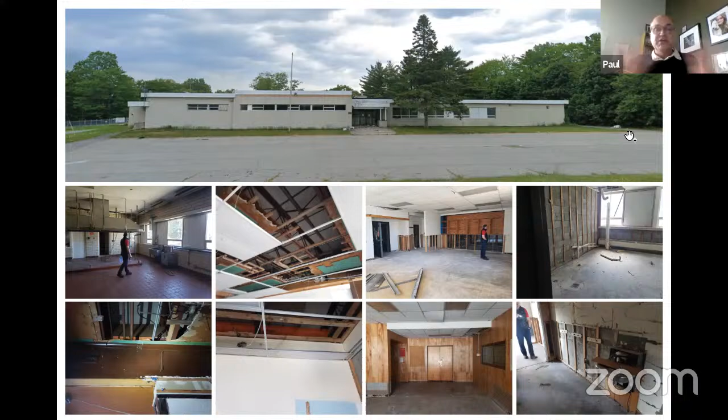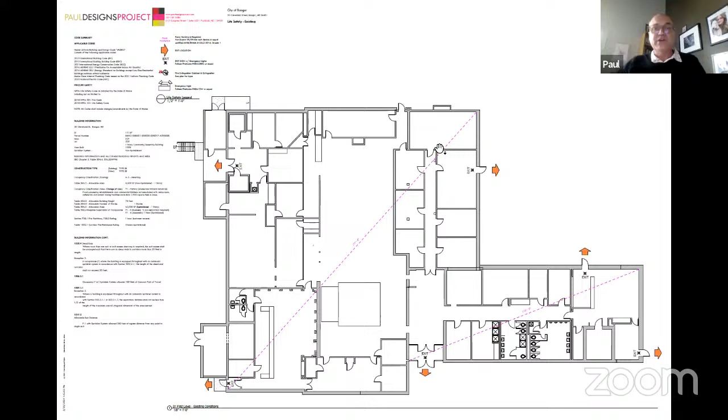And we've got our initial 3 options, we'll demonstrate that. So here are the design concepts we started with. I'm going to let my colleague Paul Bryant, our project lead, talk a little bit about the concepts and the nuances of each one of them.

I'll start by saying these 3 concepts we were looking at represent sort of a range—from what's the least you could do to what's the most you would want to do—as a framework for approaching the renovation of this building.

I'll pick up from what Paul was saying: we were trying to retain as much of the existing building as possible. That was one of the key goals of the project, outlined by Anne and her team—trying to keep as much of the existing perimeter of the building as we could, and figure out what we can use from the current shell and how we can reinterpret that into a future space for the Bangor Central Kitchen.

So in this first option, we were trying to understand how we wanted the flow of the space to work. In doing a lot of these projects, we found that the most key point of the entire building is where the loading dock is, where items are taken in and out of the building—whether to be sold, packaged, processed, or produced. In the current state of the building, for this first option, we thought it best to keep the loading dock where it was and see how that would play out in terms of access and flow. Currently, the loading dock is on a small driveway access point right adjoining Cleveland Street.

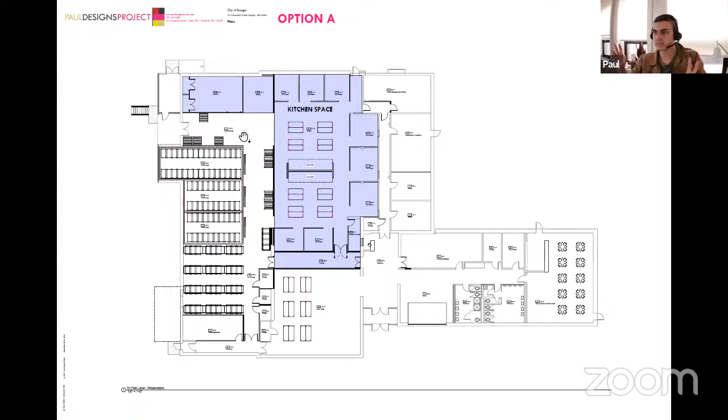In thinking about that, one key point is having a central area where receiving and outgoing products has uninterrupted flow between all avenues it needs to go, whether that's the kitchen or cold or dry storage. Having quick, open access to the loading dock is really important to us. We typically call this, in essence, the hub, an area where basically everything revolves around. That helped us articulate most of this initial scheme.

A lot of what you'll see on the interior walls, most of these filled in with white, is existing walls retained in the building. This option was trying to retain as much of the exterior and interior as possible. Some areas needed to be pulled out to make access for a new full-size kitchen and storage, both cold and dry. So that's something to factor in.

At the bottom section, you'll see that we tried to retain as much as possible and reuse this as more public space for people coming in and out of the building, while most of the kitchen and storage will all be private. You'll see that evolve as the options go on.

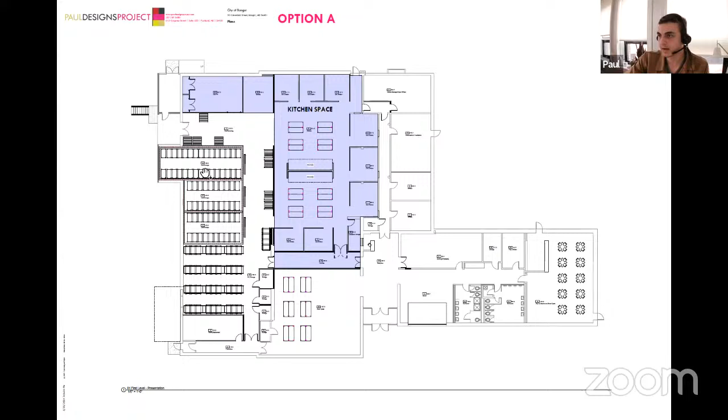To expound on that, the program has spaces for the members using the kitchen with production spaces, but there's also a public component where you might have a pop-up restaurant where somebody could test out a new menu, or train wait staff for an upcoming restaurant opening, or a multi-purpose space for a rental or indoor farmers market.

So there's the members, which we call private, and then the public is when people are invited in. There's also potential for retail, where people are selling the products they're making here. So we look at it as public-private, but it's obviously all a public building with different levels of access.

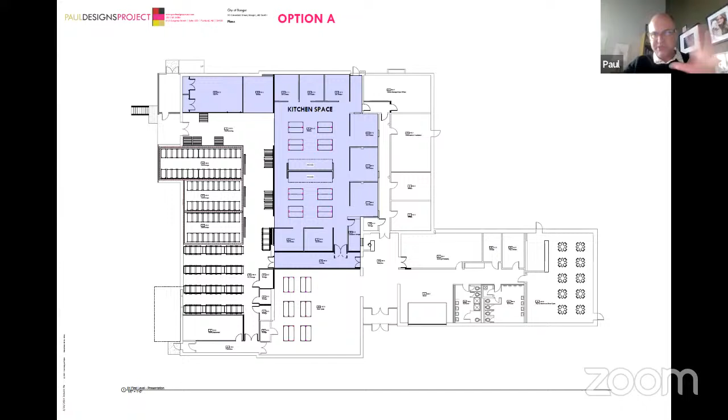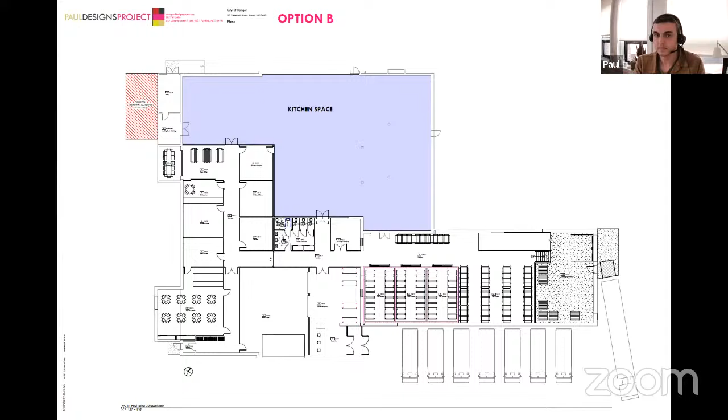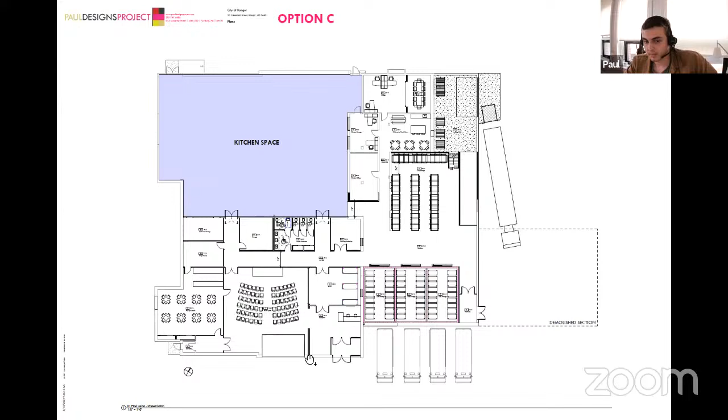So we looked at those three concepts. The third concept, from the demolishing and moving, got us some things, but not as much as we'd hoped or expected. The first option, where we kept as many of the walls, really started to compromise the program.

So the middle option, option B, if you want to go back to that, Paul, was the one we felt had the most potential, because it kept the kitchen towards the back. It gave us a large yard where we might have outdoor spaces, outdoor cooking, maybe an outdoor pizza oven, who knows. And then a linear process, which, as we said earlier, a linear, easy, clean process of shipping and receiving really does so much for the efficiency of the building.

So we decided we would take this option. We had a couple of meetings with Anne and her team and staff to talk about this, and decided to pursue option B and develop it a little further with some images of what it might look like, as well as some budgeting.

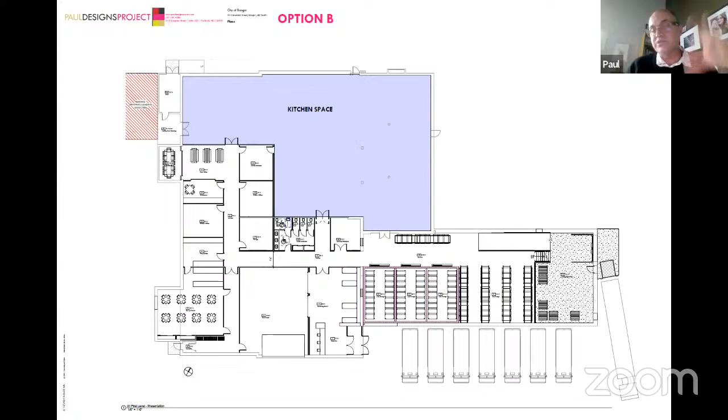The other thing we talked about, and something we found at Fork, is that there's a real need for cold banking, basically the ability to take pallets of frozen food and store them for periods of time. It's actually a very lucrative business, and we have enough space to do that, so we added it to the program.

We were just doing calculations for Fork in South Portland, looking at subleasing the space to another tenant versus cold banking. I think it was almost 3 or 4 times the income potential for that property, for that piece of the building.

So go to the plan, Paul. What we did is look at an addition, which Paul is showing you, that would be a cold banking facility—basically think Home Depot racks but frozen—while keeping our cooler. This is the option we've pushed a little further. We'll show you in a minute.

We did some more calculations on occupancy, how many toilets we really needed—spoiler alert, more than we thought—and a place for food trucks to park, trying to create a new entry feel to the space, but keeping it more or less like we showed you in option C. The kitchen is the big blue block at the top. There's a lot more to be done there, but that's the next step for us.

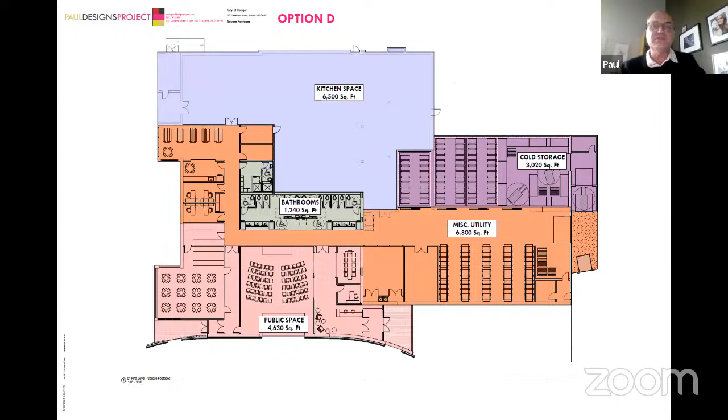If you could show that, Paul, the oval, or just go back one to the site plan to show where it is. In this part of the building, we think there's an opportunity to create a bit of a new facade and an exterior court. So it's a minimal amount of exterior work, but it could potentially transform the perception of the building.

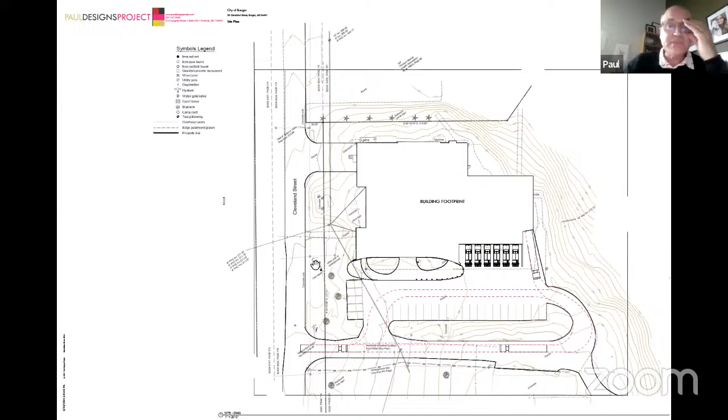And then I think you have the next image. I want to keep moving, we're taking too much time. I apologize, actually go back one to the site plan.

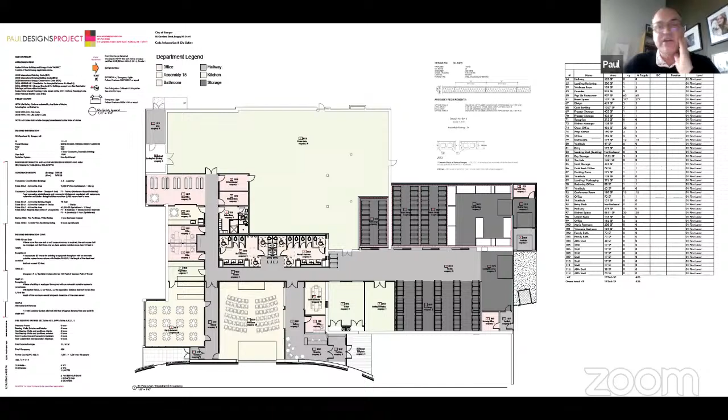Again, this is our assessment of codes and occupancy and everything. There's a lot more technical information, obviously, that we're happy to answer questions about, but we thought we'd share that. So then the next question is, how much is this going to cost?

We started this project last July, and at that point we had an estimate of about 3.7 million for the restoration of the building. It's been not quite a year, but we're seeing escalation in prices, so at about 8% escalation we're looking at about a $4 million project. And if you remember, I said we were going to add an addition for the freezer and just a few other spaces like the loading dock, and that's putting us to a budget of about 5.1 million for the project.

Now, could we not do the addition? Absolutely. Could it be phased? Absolutely. But we still feel that what we're doing is in this range of about 4 million. And the benefit of that cold storage facility add-on, I think we could do some life cycle costing, and you'd find that it actually pays for itself in a few years or so in terms of income stream. I know Anne has shared a lot of that technical data. We can answer more questions on this, but just to show where the range is, it's hovering around a $4 million job without the addition of that cold banking space.

And then, so we're architects and we like to design as well. So we did a few images of how we envision the front of the building. These are a surprise to everyone, including Anne. We just finished these yesterday, or today actually. But just to show you what might be, doesn't mean what will be. One of the things we're thinking about is what could we do to create a lively, exciting energy around this building that could have a public part and also give some identity.

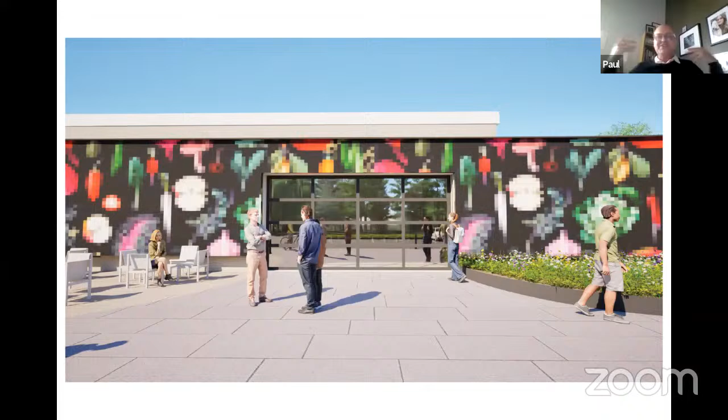You could see we're making those images of the mosaic out of 4x4 tile. When you step away, you see it, and when you get closer, they pixelate. Could that be a different material? Could it be wood fins? Could it be metal siding? Absolutely. We thought we'd have some fun with an image.

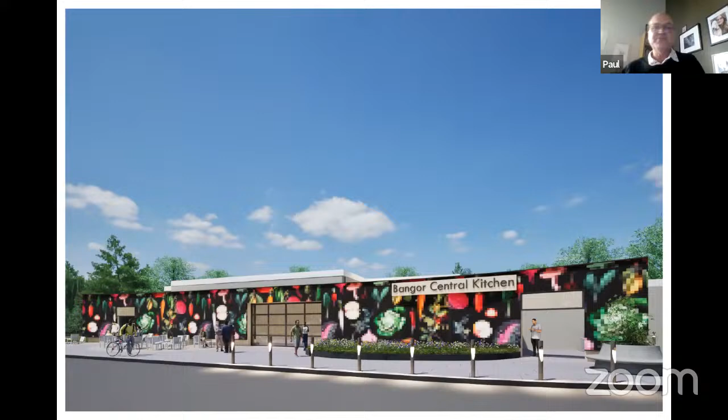But the idea is to create an outdoor court. That overhead door would go into the public space. We've got some opportunity for signage on it, some garden space, ability to drive up. Entrances for the restaurant on the left and the main entrance on the right where that person is standing, trying to really create that without adding too much to the building.

Sorry, forgot to mention, we know the building is going to need some energy updates in terms of insulation. So part of that means reskinning the building and adding exterior insulation, which is all factored into what we're talking about, but we have to redo the facade.

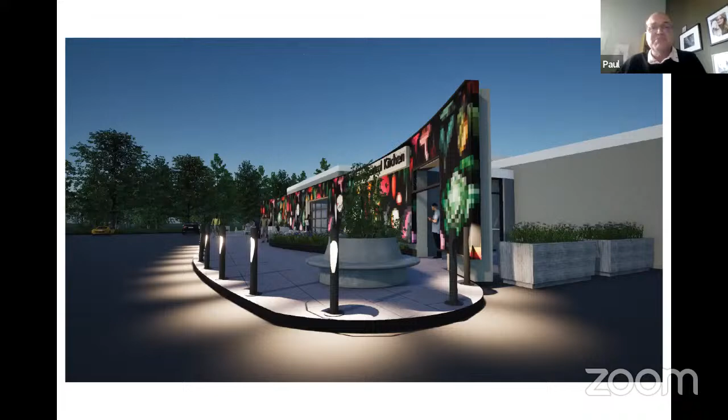What if we thought about doing an image that was vegetables and fruits or food related? I think we have a few more images as well. Here's a night image showing how there's some planters and that entrance to the building behind the wall. It's really meant to be a facade wall. Here's even a dusk image that shows the thing lit up at night and how it could be a fun thing. The idea would be to just give the building some identity.

Is that the last image we have, Paul? That is, yes, it is.

All right, so we've indulged ourselves with a little bit of fun, but all in all, we feel that there's a real opportunity, and we're excited about how much this building could really provide support for small businesses starting out, a public component to introduce people to local production. And you never know who's going to come in and might all of a sudden start a business making dumplings or salsas or whatever. So the public component is important.

And like I said, that cold banking, I think, becomes a real moneymaker and a real resource regionally, not just for Bangor, but for the whole region. So that's our presentation. I apologize, I know I've taken more than 15 minutes, but we're happy to answer any questions or go back to anything.

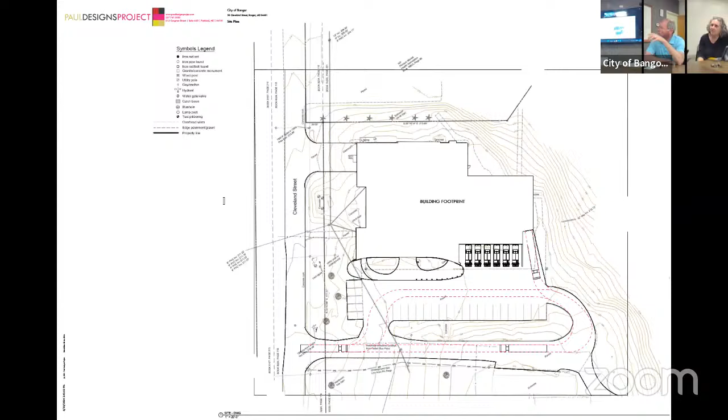Councillor Campbell? Yeah, just two. One on the cold storage, you refer to adding to the building. Is it actually adding to the building, or are you just adding it outside? We could do it inside the building. That's possible, but what we decided to do with this version is to make it an addition to the exterior.

We've been doing some, we've used these. I understand that, but is it an actual addition or just an outside walk-in freezer that you're putting in place? It's an outside walk-in freezer that we're putting, and we'd have to connect to it. So it's not inside the building. It's actually, we're calling it an addition because it'll be connected, but right, yes, it's just the metal insulated panels for cold storage.

And just as a side note, from an energy efficiency standpoint, one of the things we've been researching is when you have a full-time cold storage, when you make cold, you have heat. So we can use that waste heat to produce hot water for domestic use or kitchen use, or even use it for radiant purposes or heating purposes. So there's a way that we can sort of double bank the efficiency of those coolers and the energy use and use it for other parts of the building. So those are things that we'll develop more, but we're also trying to make this as sustainable a building as possible.

And one other quick question, I know you said you were involved in Fork Food Lab in Southern Maine. Not a long answer for this, as short as you can, but how is it structured? Is that a government-owned facility? Is it a board of directors that oversees it? How is it structured? Fork is a not-for-profit, so they have a board of directors, and they operate as, I won't say quasi-governmental, but a not-for-profit organization. So in some ways similar to a civic entity is this.

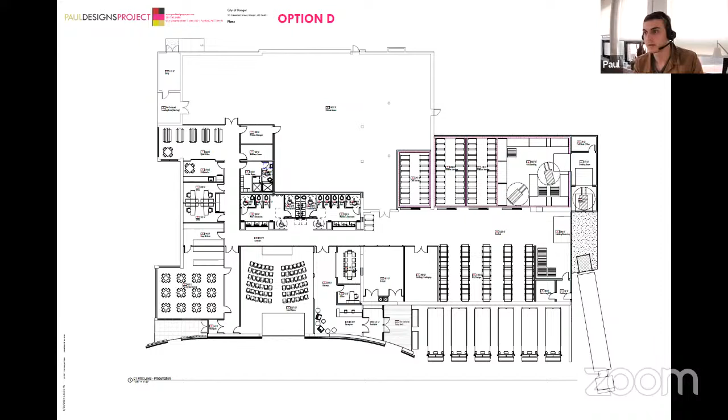I think we had planned, it was about a couple hundred thousand in revenue per year. I'm a little fuzzy, so we're probably talking closer to 100 to 150 potentially in revenue per year in rental income. Obviously that doesn't take into consideration the cost of operation, but gross income could be that much. It's really by the pallet, by the day in a lot of ways for rating this. So we could do more calculations into that, but it isn't a small amount of money in terms of income potential.

No, thank you. I was just looking for what the payback is. Yeah, it's probably a 4 or 5 year payback, is my guess, potentially.

Other questions or comments? I think it looks great. The price tag on everything in our lives keeps going up, so I'm not surprised this one went up too, but it's interesting to look at what could happen in an area of town that's been kind of left wild at this point, and it could become an anchor for that area.

One of the things we've also talked about in this committee and in the airport committee has been how people want cold storage near the airport. I know it wouldn't replace the big cold warehouse we've talked about, but would there be an impact or benefit to having cold storage so close to our airport?

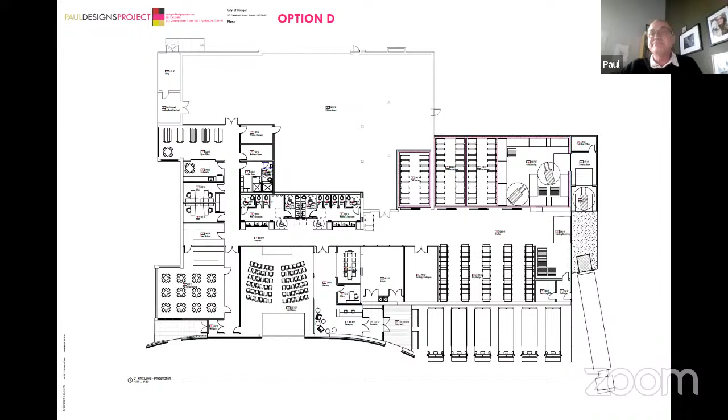Great, thank you. All right. Thank you. We appreciate the opportunity to speak with you, and we're excited about the project. So thank you all. Thank you. Bye-bye.

So our next item is the economic development strategy update. Economic Development Officer and Business Development Specialist, Brad and Gita, are here to go over their work thus far. Yes, hello.

We have been working very diligently to understand where we were in 2022 with the Economic Development Strategic Plan, how that is the same now, and how we can spruce it up and get familiar with it. We've hit the ground running, but I think it's important for us to take a step back and organize our work, because the work will come, but we need to make sure we work in a very organized and strategic fashion.

The cornerstones of the work we do are really being able to build the right partnerships with educational institutions, community organizations, the Chamber of Commerce, the Downtown Bangor Partnership, and all those entities that serve the community, as well as ensuring we have the right people at the table, including our youth. In order to ensure we have a thriving economy, we need to continue building our workforce, attract more people to our city, and increase our population.